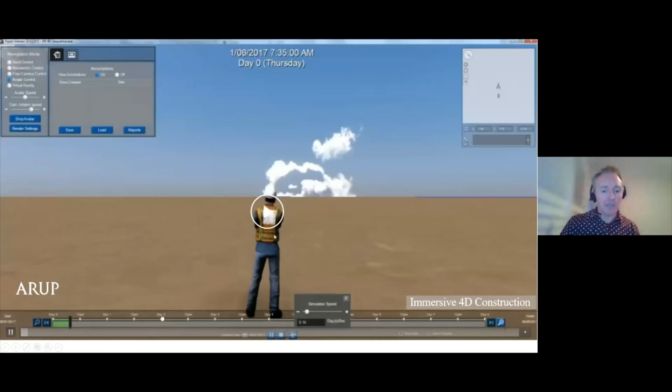And this is where the technology comes in. Dennis and John here are 2 Tiwi Islanders with no previous construction experience at all. By replacing an instruction manual with a virtual reality experience, they were able to self-teach how to put this house together. This is what they're actually looking at - I'll just fast forward to part of this. It's really a step-by-step process in which they could play, pause, rewind, and walk around the model in detail to fully understand the process at a granular level of detail.

And this proved to be a really great success, and the experience and skills that John and Dennis developed through this process then formed a positive feedback loop that was used by us as designers to refine the next iteration of the design.

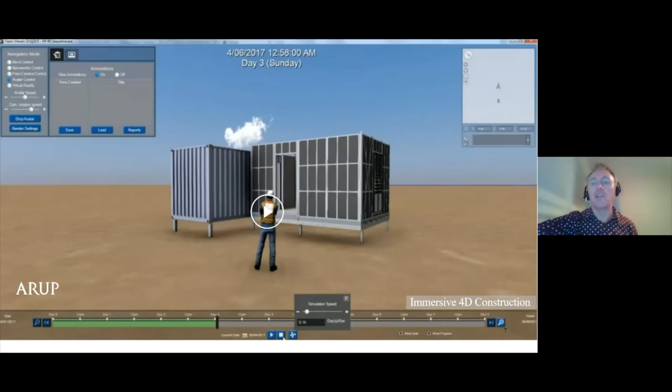The next project is a very recent one in Brisbane, led by my colleague Joe Thiang, who's currently on assignment in Los Angeles doing amazing digital fabrication work there, which I hope to show you again soon. The challenge here is a premier mixed-use high-rise development, residential accommodation above, commercial below, with a very complex reinforced concrete transfer deck in between the two.

This is the usual way that the design of such a structural element is communicated in our industry, and it's been largely unchanged for probably more than a century, when we had no option but to put black marks on white paper. At best, it's a very abstract representation of what is actually going to be built. Even myself, with many years of experience, would have to look at this for quite a long time to fully appreciate the level of complexity embedded in it, and that complexity is going to become apparent pretty shortly.

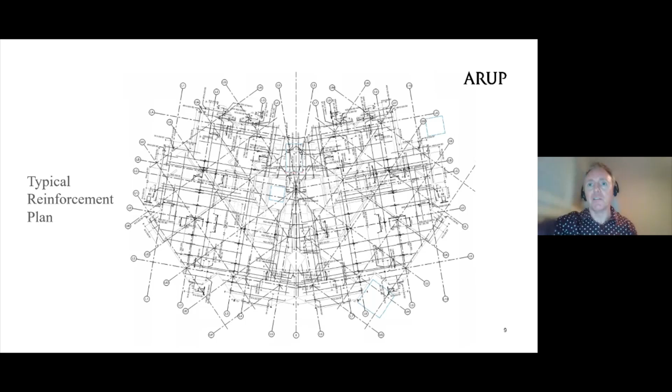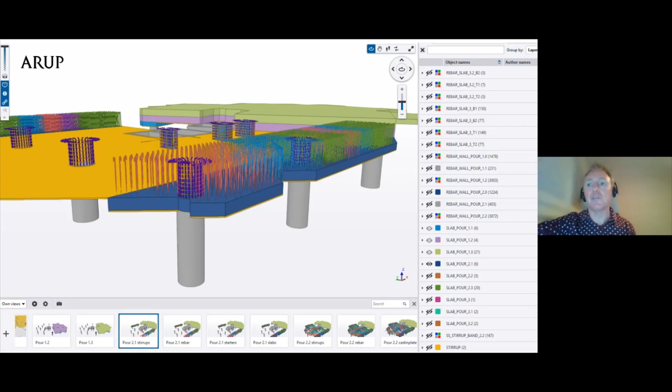The contractor, in this case ProBuild, saw the opportunity to de-risk the construction and engaged us to fully model all of the reinforcement in this transfer deck in 4D. This opened up an entirely new dialogue between the engineer and the contractor, combining the skills of both to explore construction sequences, pour breaks, and iron out all of the potential junctions and complexities long before the actual build itself. As the model exists in 3D, we experimented with porting this to a virtual reality platform, and this proved really effective and engaging.

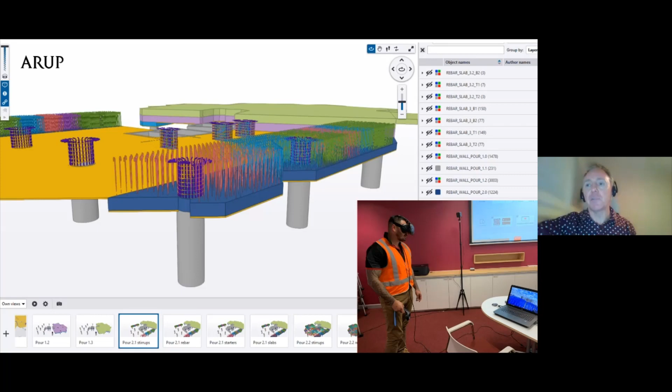The guy in the bottom right in the high-vis is actually a steel reinforcement fixer, and we never get to talk to this sort of person normally during the stages of design. Yet his input was found to be absolutely invaluable in optimizing and rationalizing this structure.

Now this video, of which I'll play just a little snippet, will give you an idea of some of that complexity. Each of those colors represents a different pour, and you can get an appreciation for how some of that complexity was resolved in 4D, pour by pour, detail by detail.

The same data was then recycled again, this time on site, using an augmented reality platform in which an accurate image of subsequent construction stages could be projected in situ onto the build itself. This greatly improves both communication and coordination on site, and proved to be a real game changer, vastly reducing RFIs.

We used this fairly new device, the Trimble Site Vision device, which the chap in the bottom right-hand corner is using in high-vis. We now have one of these in every one of our offices in Australasia for exactly this reason, because it makes such a big difference. We see this as a real game changer potentially.

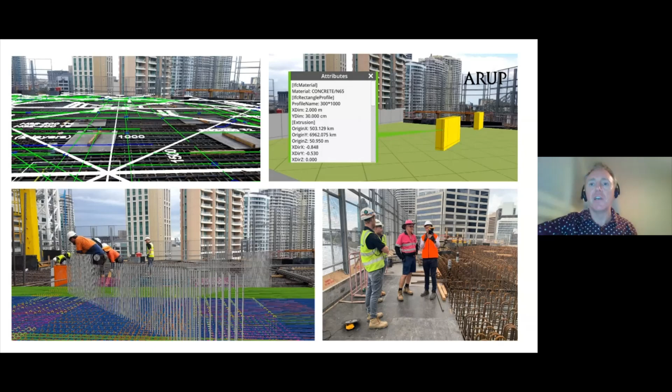Now these projects both illustrate the benefits of digital fabrication and how technology can be used to overcome some of the skills shortages. Furthermore, just creating an environment, often a virtual one, in which both designers and builders can collaborate, can lead to much better outcomes for the project, better and more efficient use of materials and available skills, and also simpler and safer to build.

We're super keen to do much more of this end-to-end delivery, just taking the digital assets originating in the design and running it right the way through construction and even post-occupancy. So if you are interested in collaborating, taking that journey with us, please get in touch. Thank you very much indeed.

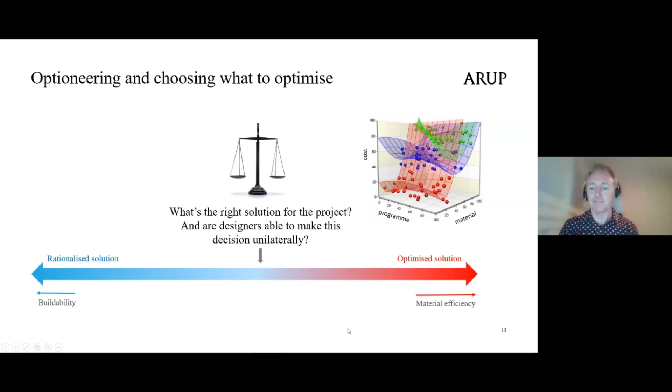Thank you, Sean. That was really fascinating and draws out the connection that we've been discussing between the contractor and the designer, and the importance of having that input throughout the process, particularly in those initial stages.